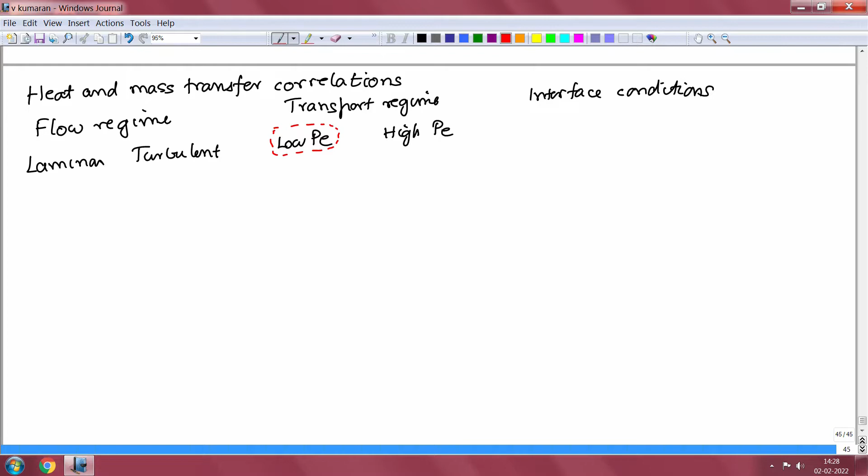At low Peclet number, of course, convection is not important. The diffusion is dominant, and therefore the Nusselt or the Sherwood number have to both be equal to constants.

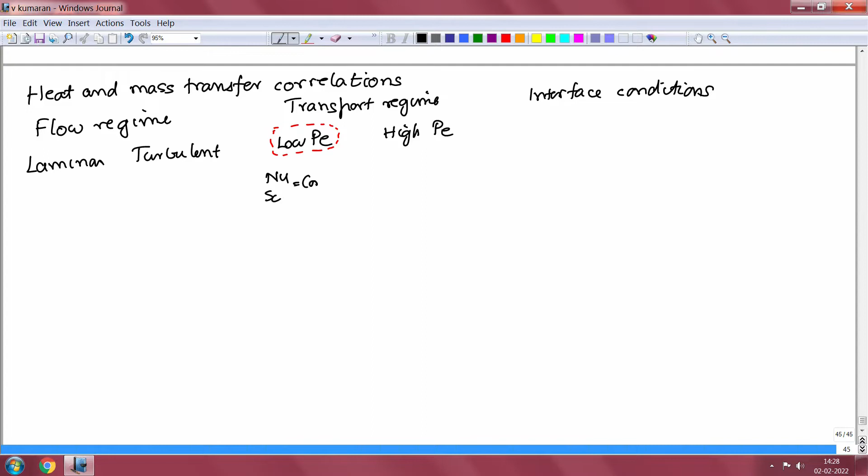Now at high Peclet number, the transport does depend upon convection, and in this limit one can further consider two different regimes: one is the low Reynolds number, and the second is the high Reynolds number.

At low Reynolds number, the Nusselt number and the Sherwood number depend only on the Peclet number, because the flow is linear. The velocity at any point in the flow divided by the characteristic velocity - the characteristic velocity being the average velocity in a pipe or the free stream velocity for a suspended particle - is a constant, even though the velocity itself changes. The ratio of the velocity locally, the velocity field at any point divided by the characteristic velocity, is unchanged. Because of that, all the information regarding the velocity profile is contained within that characteristic velocity itself. Therefore, for a given configuration, the Nusselt number or the Sherwood number has to be equal to some function of only the Peclet number.

And here, of course, there is no such guarantee. It depends upon both the Peclet number and the Reynolds number.

We had derived correlations for the pipe flow, for a parabolic flow in a pipe in the laminar regime. We got a correlation that was proportional to the Peclet number to the 1/3 power. For turbulent flow, Re power 0.8, Pr power 1/3 was the correlation, times a constant. I told you that the low Peclet number regime is not relevant for a pipe flow, because at low Peclet number it implies that the temperature or the concentration field diffuses across the entire cross section over a distance smaller than the pipe diameter. So there is no point in having a long pipe in that case.

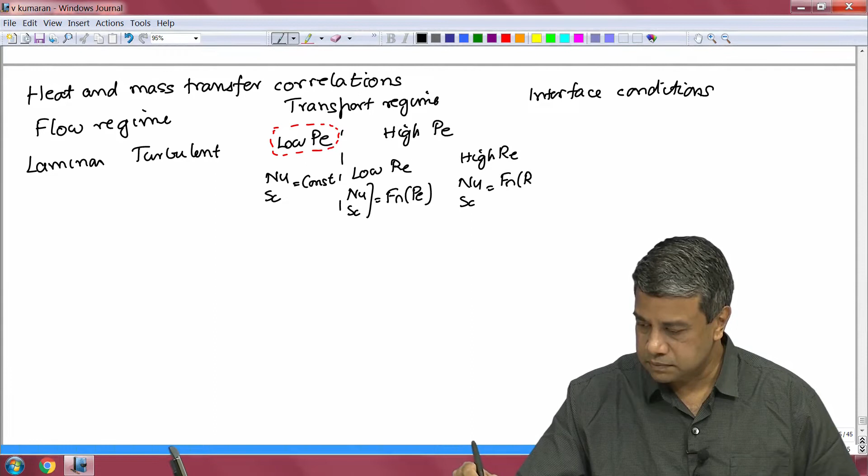Similarly, for suspended particles, we had got the correlations. At low Reynolds number and high Peclet number, we found that the Nusselt and Sherwood number were proportional to Pe power 1/3. Now, that Pe power 1/3 scaling we have seen in multiple cases, in the flow in a pipe in the laminar regime, for example, as well as for the flow around a particle. And that scaling will actually be observed for all configurations where the interface condition is a no slip condition at the surface.

You can have two types, rigid and mobile. In rigid cases, you have, for example, for a solid particle, a no slip condition - the fluid velocity at the particle surface is equal to the particle velocity. For a mobile surface, for a gas liquid interface, you have a zero shear stress condition. For a gas liquid interface, for example, there will be a zero shear stress condition at the interface. We had seen those two conditions earlier.

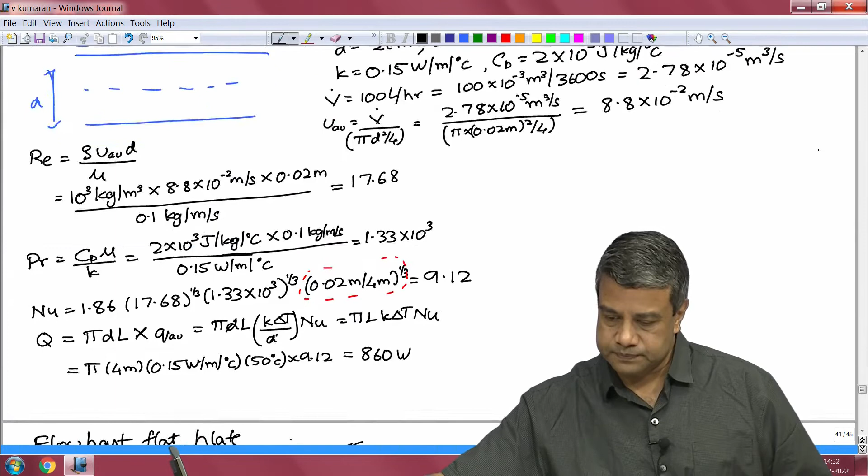For a liquid film, for example, at the liquid gas interface you have a zero shear stress condition, so the slope of the velocity profile goes to zero at that interface. The slope is related to the velocity gradient, which is related to the stress by Newton's law. So if the stress is zero, the velocity gradient is zero and the slope is equal to zero. On the other hand, at a liquid solid interface you will have a zero velocity condition, that is, the velocity of the fluid at the surface is equal to the velocity of the surface itself.

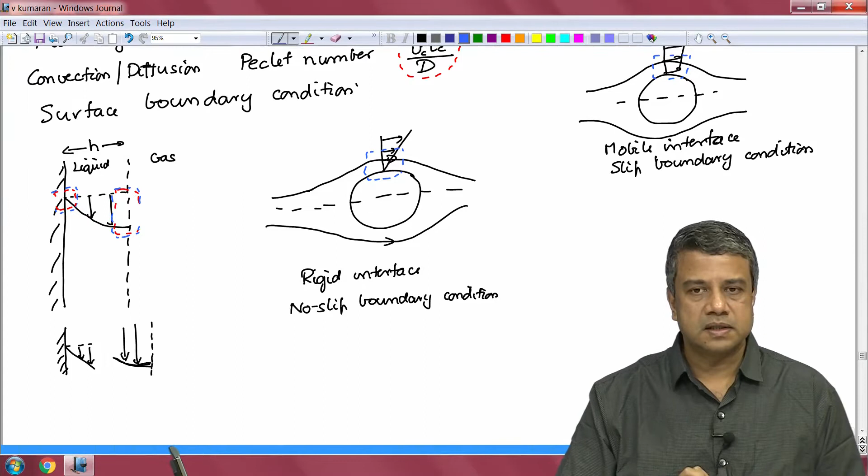So a zero velocity condition for a solid particle, zero stress condition for a gas bubble, for example. For a liquid drop you will have continuity of velocity and continuity of stress, in which case the velocity at the interface is actually non-zero, because for a drop the liquid inside the drop can also move, can also circulate. Therefore, when a drop translates with respect to the fluid, there is a stress exerted at the surface which generates a fluid flow within the drop.

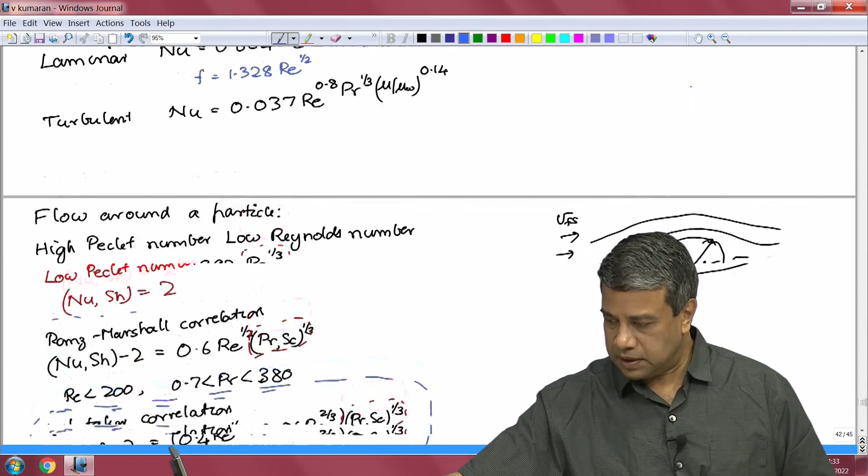That has to be equal - the velocity of the fluid within the drop has got to be equal to the velocity of the fluid outside the drop at the interface. So when we had this no slip condition at the surface, we found that the Nusselt and Sherwood number were both proportional to Pe power 1/3 in the limit of low Reynolds number and high Peclet number. I had given you some correlations for high Reynolds number and high Peclet number as well, where the flow profile is complicated, with a transition through different flow patterns.

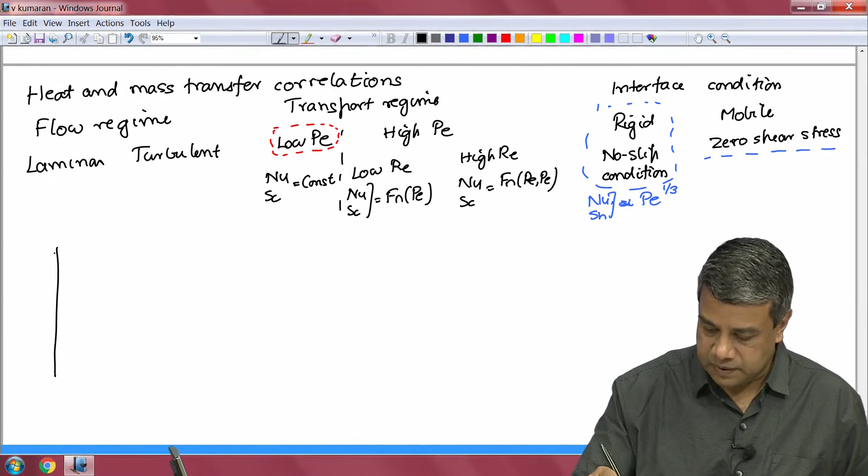Now I will consider what happens if you have a mobile interface. Let us take the concrete example of a falling film of thickness h and length L, in which fluid is flowing downwards at steady state. At steady state, the velocity gradient at the liquid-gas interface has to be zero.

What typically happens in this configuration is you have some species in the gas which has to be dissolved into the liquid - scrubbing of a gas to remove pollutants, for example. The gas molecules of the pollutant diffuse to the surface, and since they are soluble in the liquid, they dissolve in it. The low Peclet number limit is not of relevance here, because a low Peclet number would imply that the concentration of the gas equalizes across the entire film by the time it travels a distance comparable to the thickness. The reasoning is similar to pipe flow, so I won't go into detail, but at low Peclet number there is an equalization of concentration across the film over a streamwise distance comparable to the thickness. So there is no point in having a long contacting section.

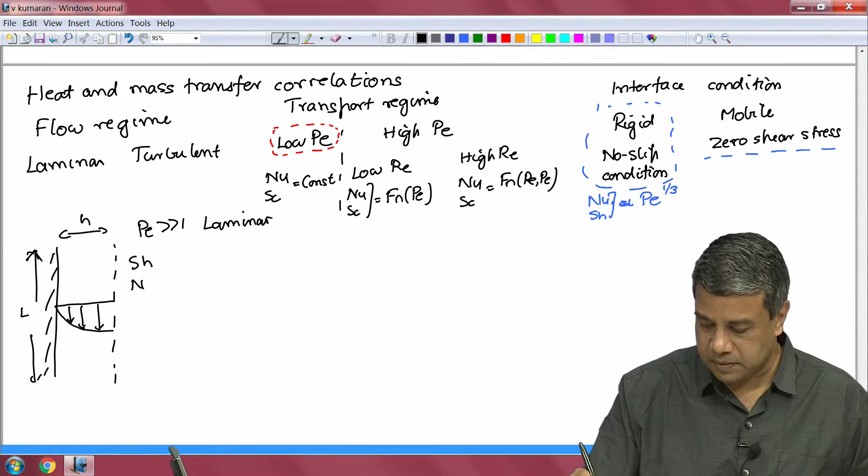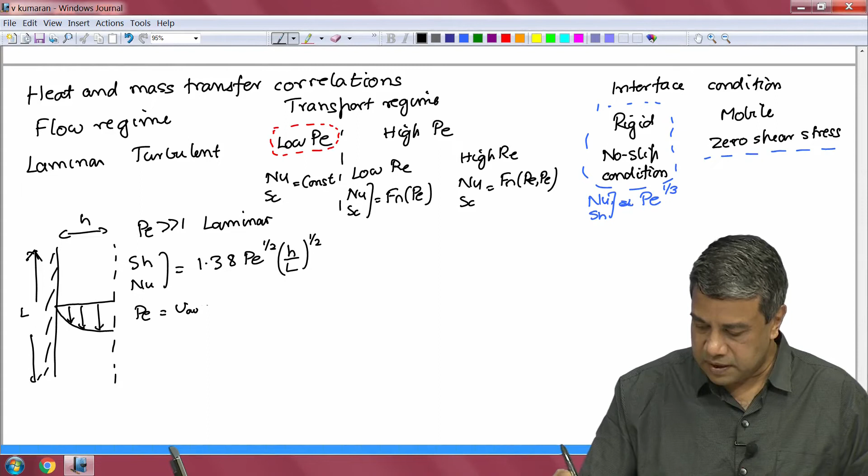If I look at the limit of high Peclet number and laminar flow, the correlation for the Sherwood number, or the Nusselt number for heat transfer, is of the form 1.38 Pe to the power 1/2 times (h/L) to the power 1/2, where the Peclet number is defined as the average velocity times the thickness h, divided by the diffusion coefficient for mass transfer, or equivalently the thermal diffusion coefficient for heat transfer. This is valid at high Peclet numbers so long as L/H is much smaller than Pe. This correlation is valid for laminar flow.

I should note that the scaling is different here - it goes as half power, whereas in the case of pipe flow, for laminar flow, we found the scaling as 1/3 power. That is because of the difference in boundary conditions between a rigid surface and a mobile surface. At a mobile surface, the velocity of the fluid at the interface is non-zero, so as you approach the interface, the strength of convection is finite, and you get a half power for the Peclet number. We will see later why that is true - we will actually derive this correlation later while discussing unidirectional transport.

At high Peclet number, for a mobile interface, you get a half power for the Peclet number for transport, subject to a restriction. I'll explain briefly why that restriction arises, and we will see this quantitatively later. When you have gas diffusing into the surface from the liquid, and the Peclet number is large, the strength of convection is large compared to the strength of diffusion into the liquid film. So any gas that dissolves at the interface gets rapidly swept downstream due to the strong convection, and the dissolved gas is restricted to a thin layer, called a boundary layer, close to the surface. We will examine how this boundary layer grows as we go downstream.

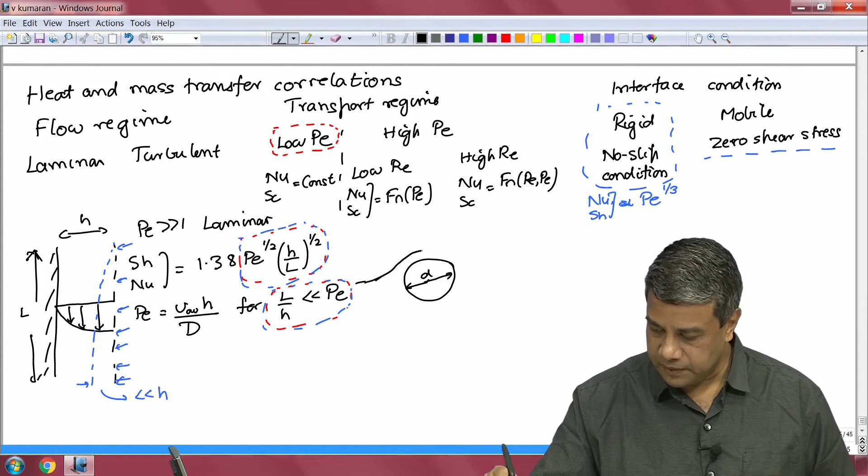If you consider a bubble of diameter d, with liquid flowing around this bubble, at the interface you have a slip condition for the velocity. We saw earlier that if you have a no slip condition, the Nusselt number and the Sherwood number are proportional to Peclet number to the 1/3 power. In this case, the Nusselt number and Sherwood number correlation is...

The correlation is 0.652 Pe to the power 1/3 for low Reynolds number... correction, in the limit of low Reynolds number, the correlation is of the form: Nusselt number or Sherwood number equals 0.652 Pe to the power 1/2. I told you that for a mobile interface, the correlation is always proportional to Pe to the power 1/2 in the limit of low Reynolds number and high Peclet number.

For the flow past a bubble, you can also get a correlation in the limit of high Reynolds number and high Peclet number. Recall that for the flow past a bubble, you do not see the kinds of patterns seen for flow past a solid particle - the formation of a separation bubble at the rear, vortex shedding in the wake, turbulent wake formation, and turbulent boundary layer formation upstream. Those transitions do not occur for a bubble moving relative to the fluid because of the mobile interface and the zero stress condition at the interface.

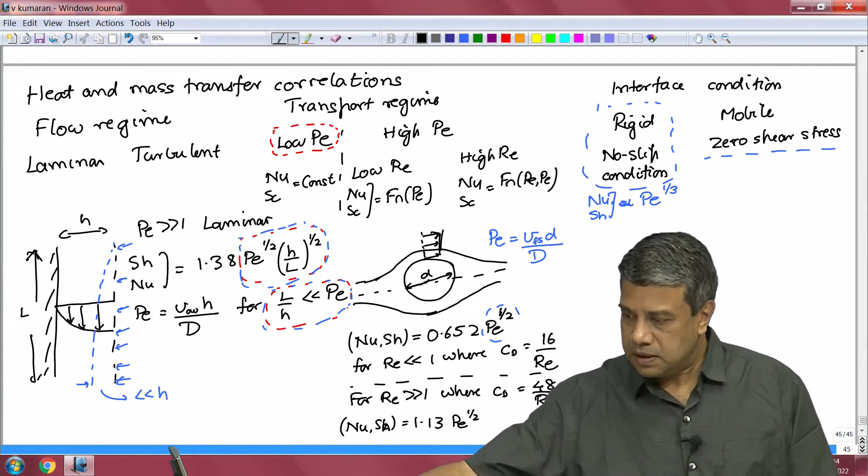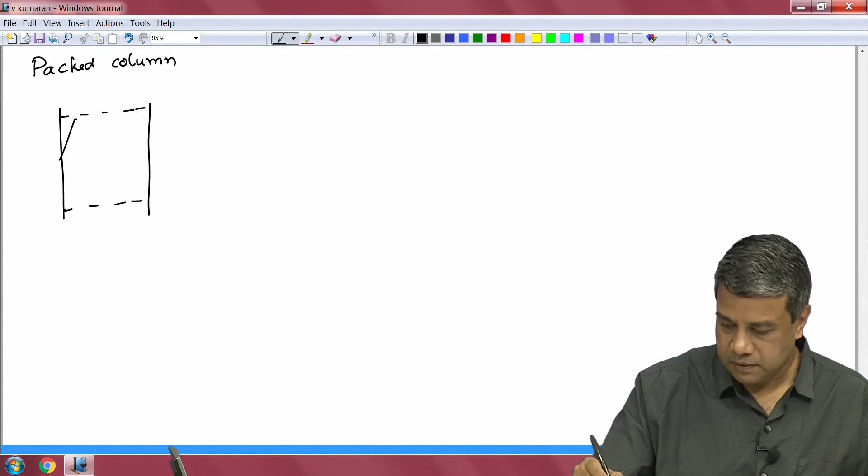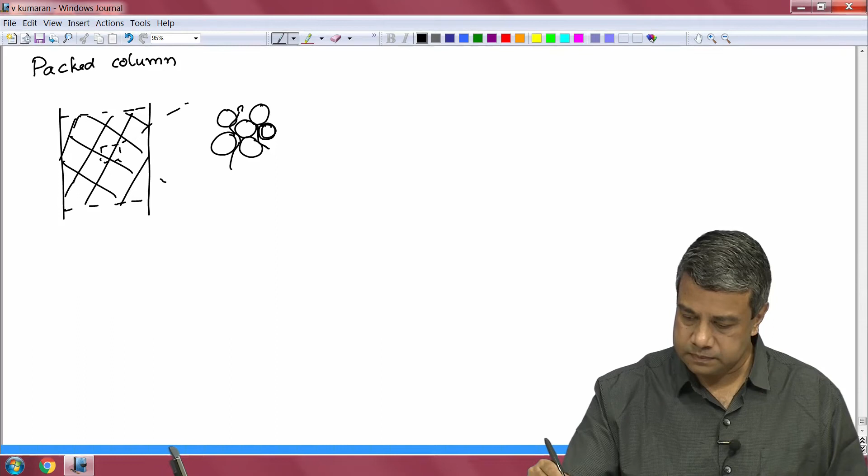Finally, the last correlation I need to discuss is the heat and mass transfer for a packed column. Recall a packed column filled with particles, and the fluid flows through the interstices between the particles. The fluid velocity, the superficial velocity Us, is the flow rate divided by the cross sectional area of the column, and you apply a pressure drop across that column in order to generate fluid flow through the column.

Us is the fluid velocity if the particles were not present - that is the superficial velocity. And recall that in order to write correlations for this case, we have to consider the characteristic diameter, the equivalent diameter of the voids between the particles, because the fluid is flowing through the voids between the particles. Therefore, the surface area has to be the surface area of the particles, and the equivalent diameter has to be based upon the equivalent diameter of the voids, not of the particles.

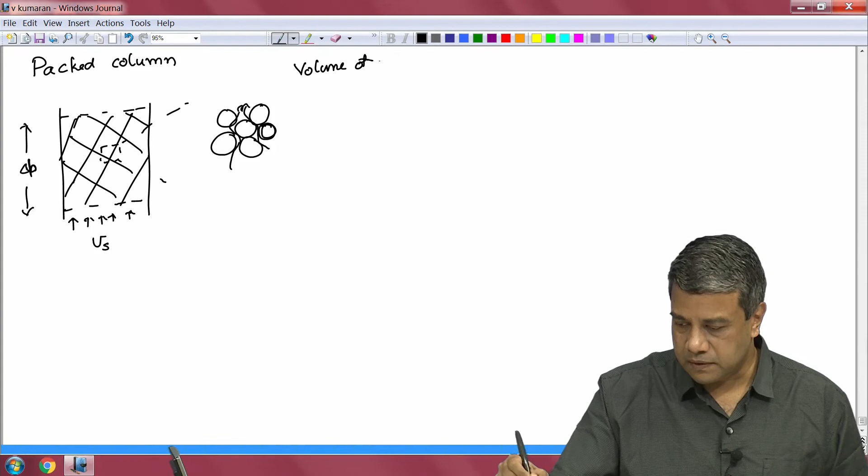If you take the total volume of the column as V, the porosity is equal to epsilon. Porosity is the volume of voids divided by the total volume. And particle volume Vp and surface area Sp.

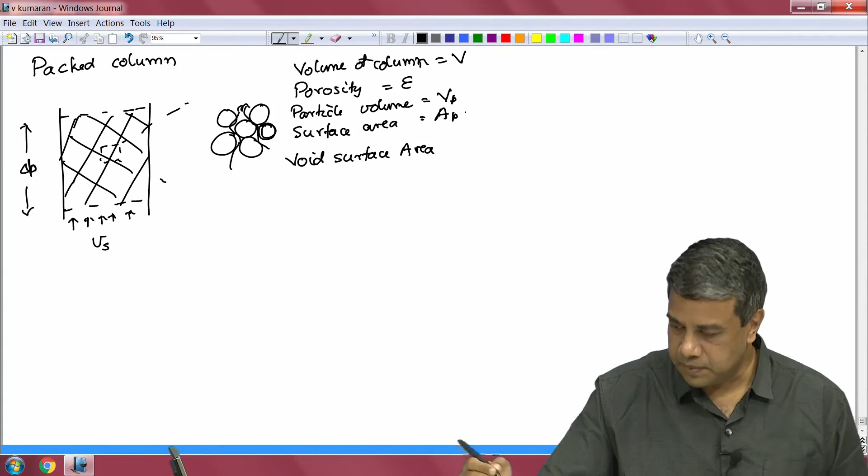I'd said that the void surface area - notationally I should write this as Ap, which is what I had used earlier - void surface area is equal to the particle surface area. Void surface area is the same as the particle surface area, because the surface is an interface between the fluid and the particle, and the fluid is flowing through the voids.

So this will be equal to number of particles times the area of one particle - void surface area is number of particles times the area of one particle. Void volume is equal to the porosity, or the void fraction, times the total volume.

Now, we do not know n, the total number of particles. This can be related through a relationship between the volume occupied by particles and the total volume of the fluid. The volume occupied by particles is equal to the number of particles times the volume of one particle.

This volume is equal to 1 minus the void fraction times the total volume. The void fraction times the total volume is the void volume. Particle volume is equal to total volume minus the void volume, which is equal to V into 1 minus epsilon.

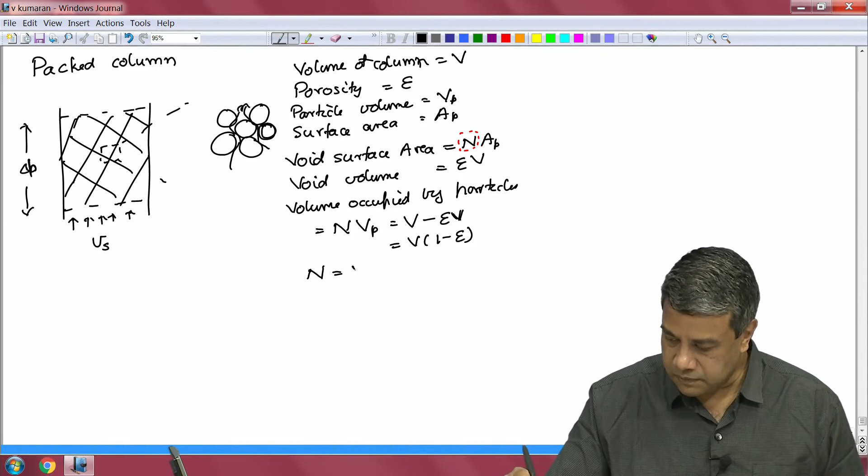Therefore, I can relate the number of particles to the void fraction and the volume of one particle: N is equal to V into 1 minus epsilon by Vp. And therefore, the void surface area is equal to n times the surface area of a particle.

That is the void surface area, and this can equivalently be written using the factor 6, because the equivalent diameter of the particles dE is equal to volume of particle by area of particle into 6.

D is 6 Vp over surface area. That is the void surface area: equal to V into 1 minus epsilon by 6 dE.

Therefore, the void equivalent diameter, dE void, is equal to 6 times V of void by S of void. We had substituted dE for the volume of the void and the surface area of the void, and the volume of the void was equal to epsilon into V. Using both of those, you get this is equal to particle diameter times epsilon by 1 minus epsilon. That is the characteristic size for the voids.

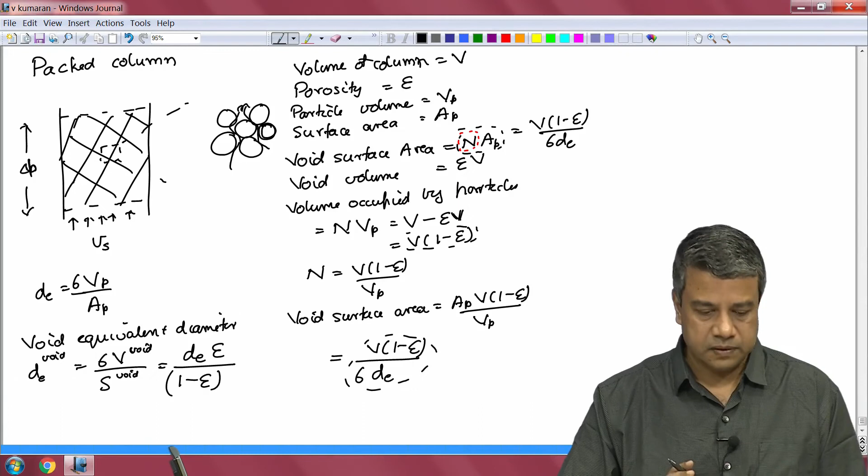So we had already done this calculation before to get the characteristic diameter of the voids and the characteristic surface area of the voids.

The reason I went through this is because the Nusselt number and the Sherwood number are defined based upon the surface area of the voids: equal to the transport rate divided by the void surface area.

There is a mistake here, it should be 6 times V by 6 V into 1 minus epsilon by dE, because AP by VP is equal to 6 by dE, so there should be a factor of 6 here. So it's equal to the transport rate per unit volume divided by 6 into 1 minus epsilon by dE.

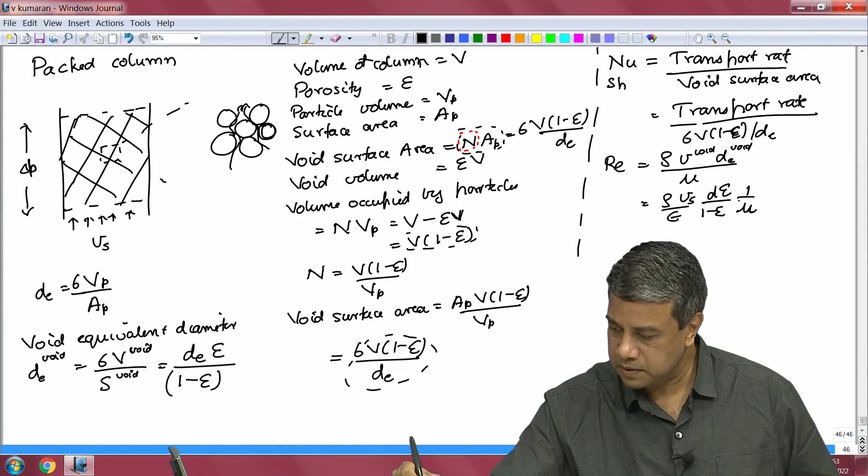And the Reynolds number will be defined based upon V void times D void equivalent by mu, which is equal to rho. The void velocity equals the superficial velocity by epsilon, and the diameter is equal to d epsilon by 1 minus epsilon. These cancel out and I get rho Vs dE by 1 minus epsilon into mu. That will be the definition of the Reynolds number, which we had actually derived earlier as well.

So here the correlation is written in terms of this Reynolds number and the Sherwood or Nusselt number, and the correlations have the same form as for internal flows, except that now the fluxes are expressed in terms of the total surface area of the particles, and the Reynolds number is based upon the equivalent diameter of the void, not of the tube or channel. Nevertheless, the form of the correlation turns out to be the same.

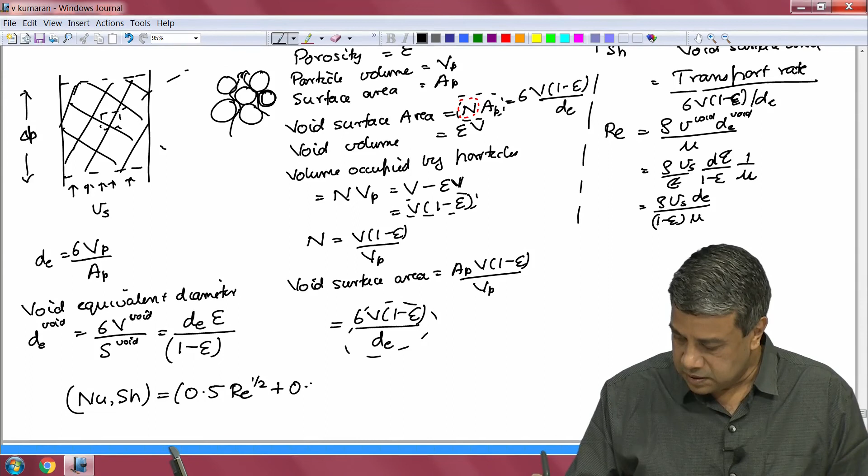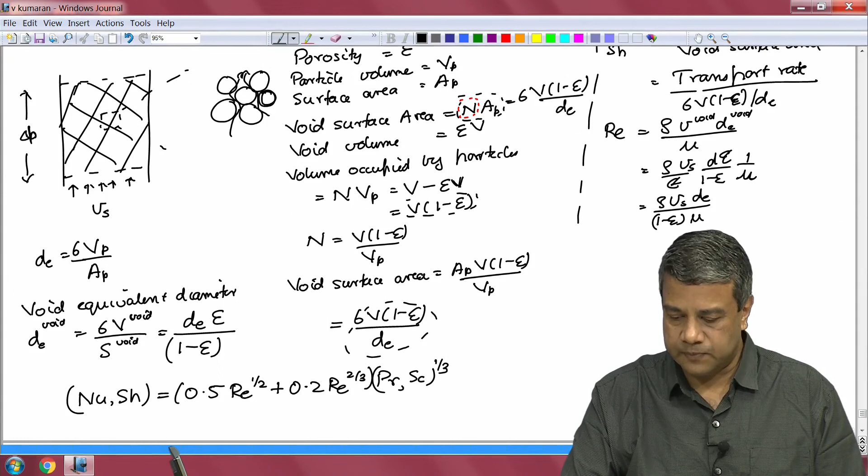One standard correlation in literature is Re to the power half plus 0.2 Re to the power 2/3, times Prandtl number or Schmidt number to the power 1/3. These have exactly the same form as earlier, except they are now based upon the Reynolds number for flow through the voids, and the Nusselt number and Sherwood number are per unit area of the surface of the particles.

To convert that into the transport rate per unit volume, you have to divide by this factor. If you do those two, you get this as the correlation for the transport in a packed column.

So this completes our discussion of correlations for diffusion problems, at low Peclet number where convection is not important, and forced convection problems where the velocity field is specified and used for defining the Reynolds number, Peclet number, and so on. I will go through one final topic, natural convection, in the next class, and with that we will complete our discussion of correlations. I will see you in the next lecture.